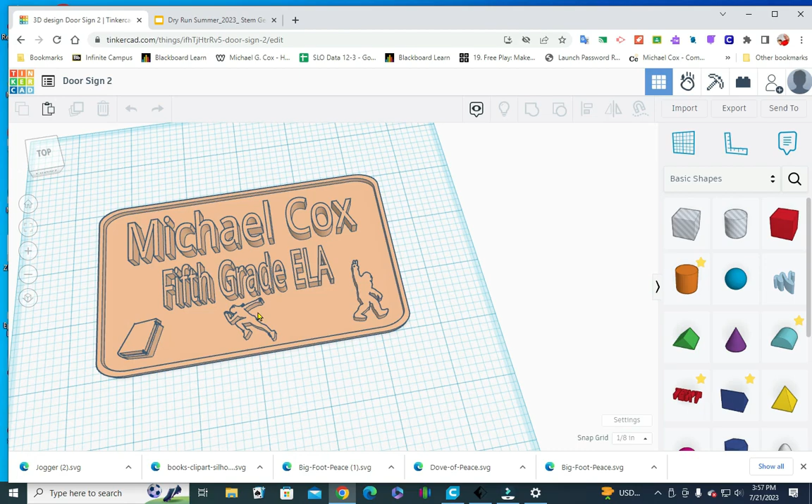Hello, today we are going to cover how to make a door sign with different symbols that are preloaded into our program. So we're going to get started.

I enlarged my cursor so you can see it moving around. Sometimes I tend to go real fast, so at any time feel free to stop the video, complete the task, and then restart.

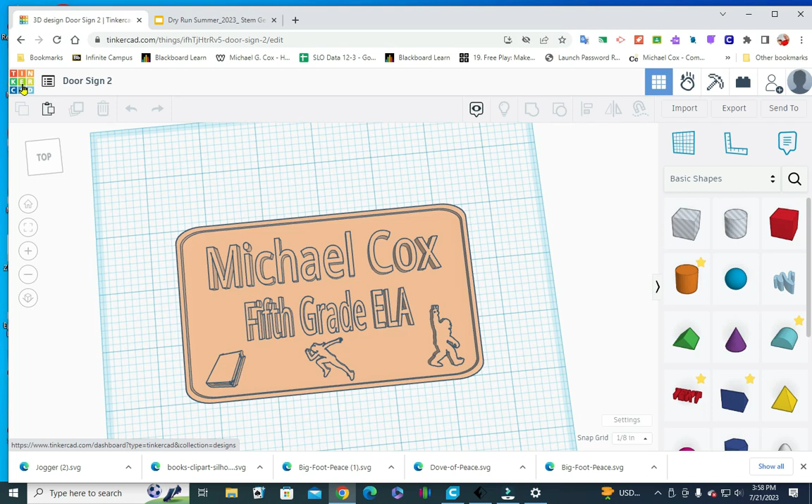So this is what our final project should look similar to. I'm going to go back to my home page, up here to the Tinkercad symbol. Click on that.

And it should take us back to our home. I'm going to come up here to create. Click on create, slide down. We're going to do a 3D design.

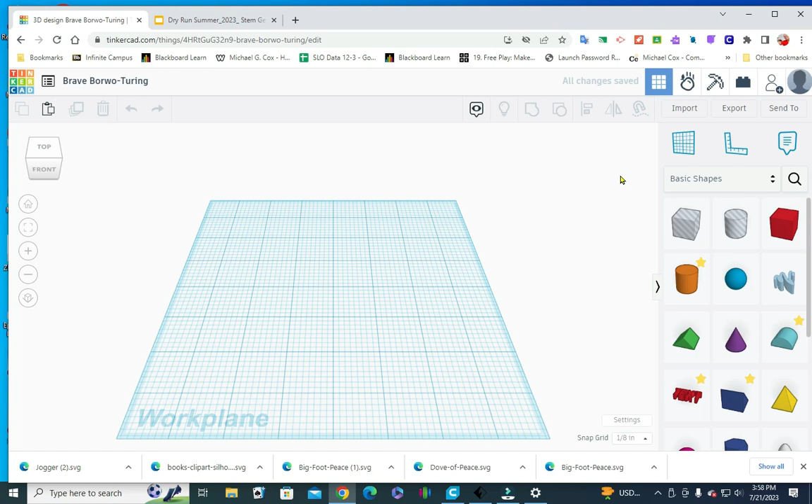And here we have our workplane. First thing we're going to do, we're going to slide up here and click on this text and give it a name. Please give it your name. I'll type Michael, and I'm going to put today's date, which is July 21st.

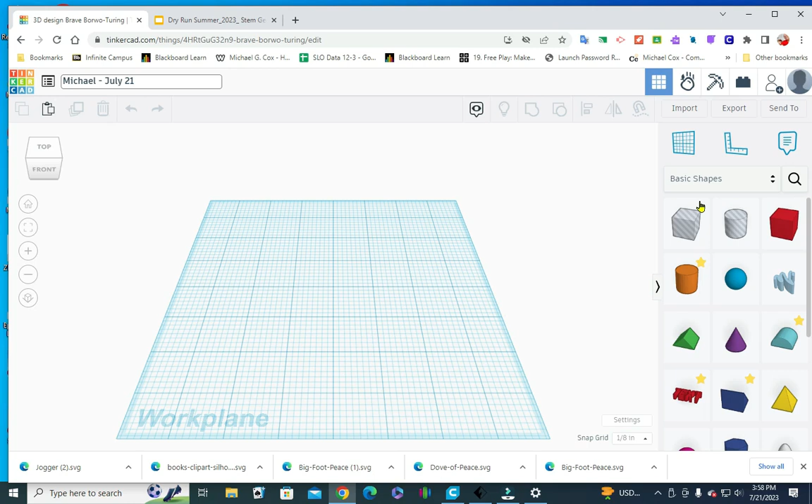Next thing we're going to do, we're going to make sure this is on inches because we're going to be talking in inches and the conversion can be challenging. So we're going to come down here into the corner of our page and click on settings. It says units. Mine's already on inches.

So you're going to drop that down, and you're going to choose inches. I'm going to suggest you make it default so that way you don't have to do that every time you open up this page.

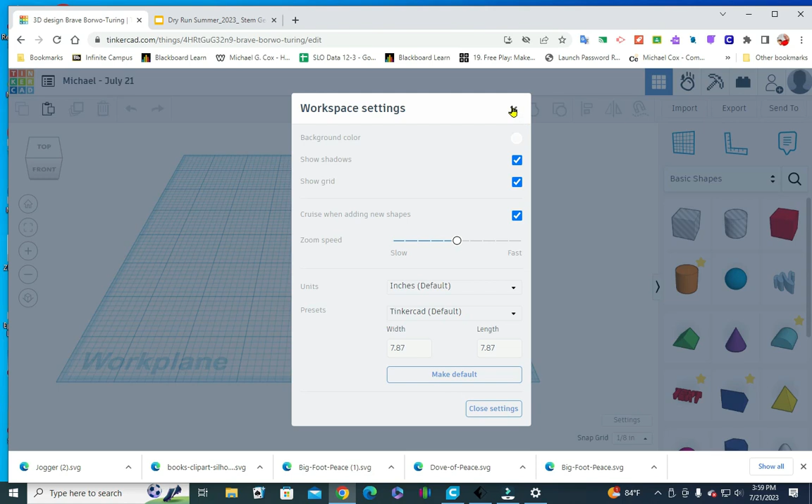So here we are. Here are our basic shapes over here. I'm going to assume you have basic knowledge of Tinkercad.

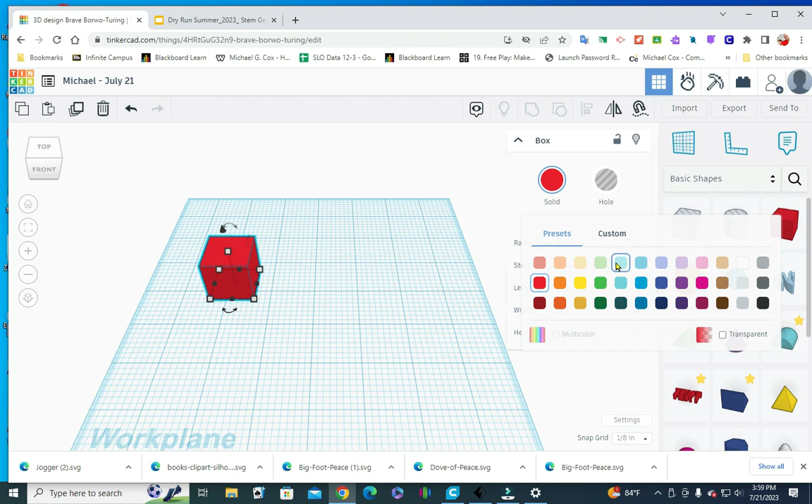For our door sign, I'm going to pull out a block. I do want to remind you, you can change the colors. It's not going to change the print color, but it makes it easier to work in a lighter color. You can see better, and you can see the edges and handles better.

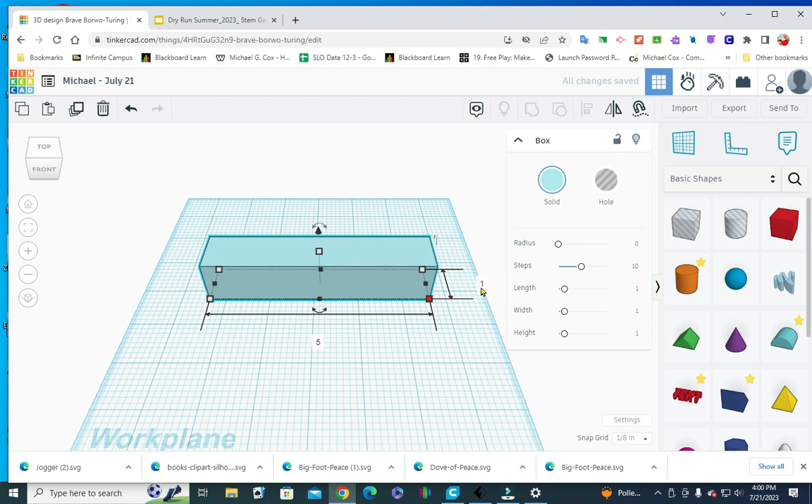We are going to click on this corner handle, and we are going to make this first one 5 inches long. We are going to make the second one 3 inches.

And we are going to go to the center handle, and we are going to make this 1/8 of an inch, which in decimal is 0.125. And there we have our basic shape of our door sign.

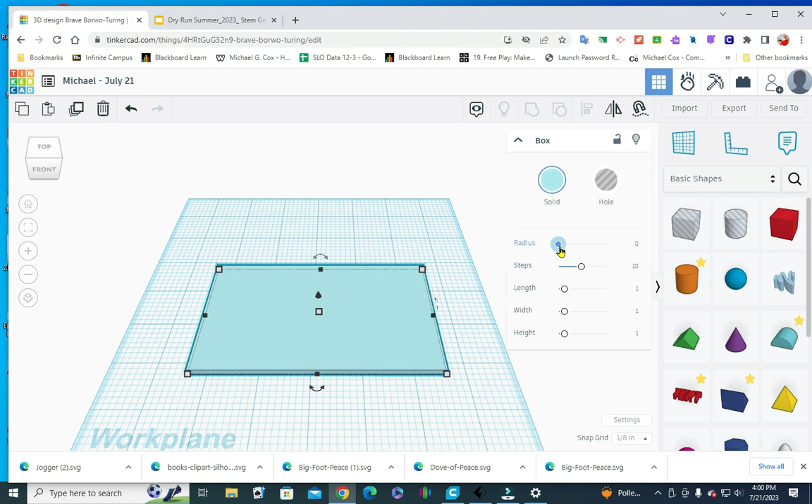I like to come up here where it says radius and round the edges just a little bit. And there we have it.

Whenever you're moving your shape around, please use your arrows on your keyboard. It makes it simpler and you will avoid making unnecessary changes.

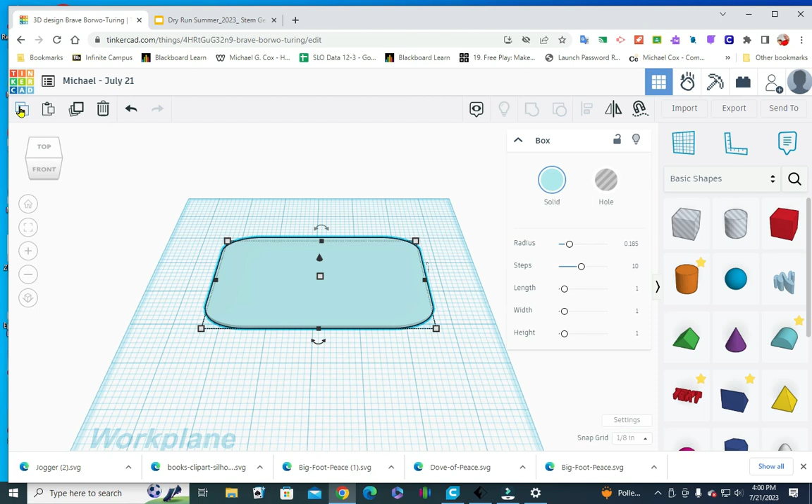So now that I still have it highlighted. I'm going to come up here to copy, and I'm going to paste. Now I'm going to bring down the item that I just copied and pasted with my arrow keys, and we're going to make this a little bit smaller.

I'm going to move my base up. So we're going to make this one a little bit smaller by 1/8 of an inch. I'm going to click on this handle, click on the 5, make that 4.875.

And I'm going to come over to this side and make that 2.875. And now it's 1/8 of an inch smaller than the shape we have up here.

We are going to leave that second shape, the smaller shape, highlighted. You see the little cone there. We are going to raise this off the board. You just click and drag and you'll get a number over here. We're going to make it 0.025 and enter. And it's just raised up barely off the board.

And we're going to also make it a hole. So the way you do that, you come over here, it says solid or hole. We're going to make it a hole.

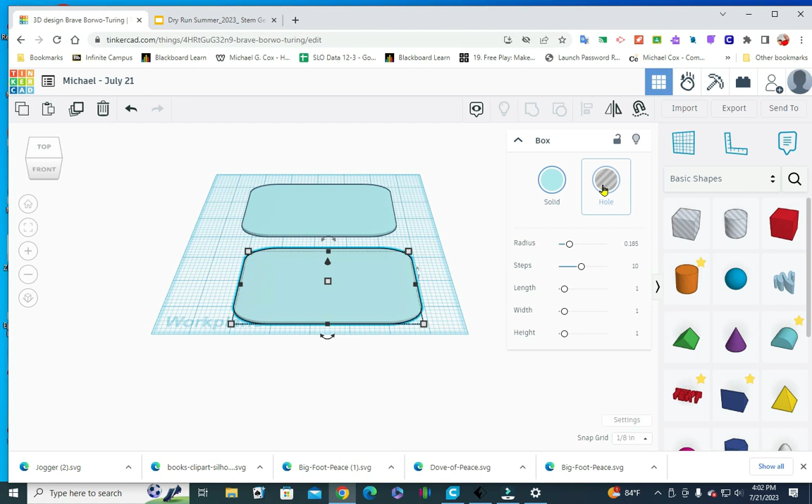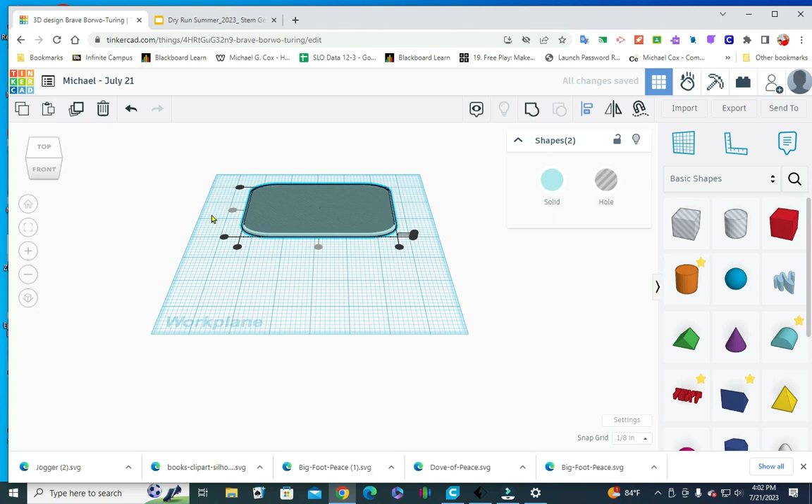Now I'm just going to bring it up here, put it over top of my shape, and I'm going to click and drag over both of them. Click on the align tool, and I'm going to align it on the X and the Y axis, and I'm going to group it together. And now we have our sign that has a little lip on it now.

Okay, let's make it a little fancier. First thing we're going to do is put our name up here. So I'm going to pull my text out.

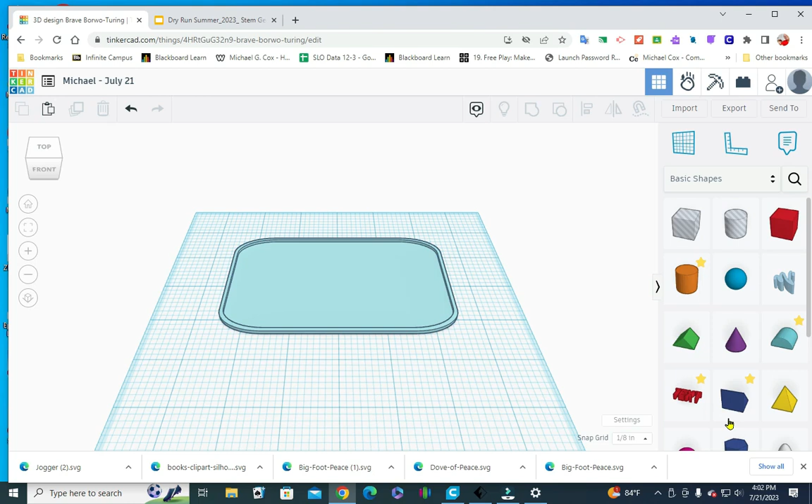I'm going to recommend that you use the font sans. That way you avoid those hanging text parts. See how they have the hanging parts on it? Sometimes when they print, they do not print so cleanly.

Alright, and then we are going to go to the Z axis, and we're going to change that height to 0.25, a quarter of an inch.

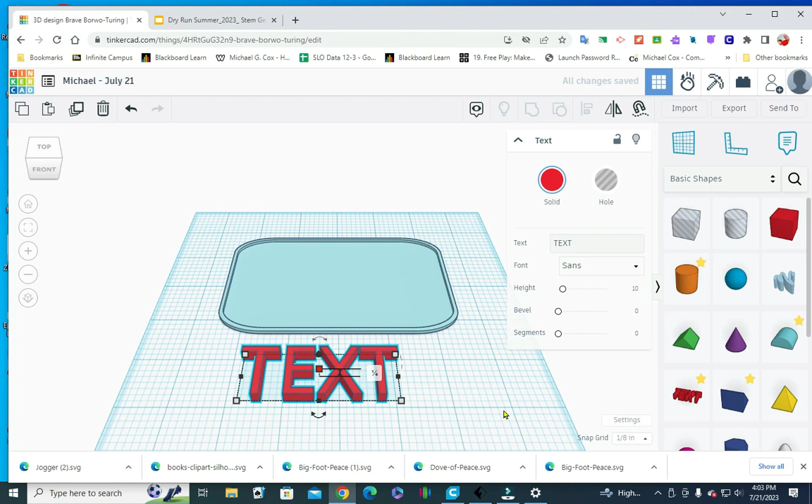Come over here to where it says text. I'm going to backspace that out of there, and I'm going to type my name in there. Don't be afraid if it looks so big that it's not going to fit, because we can shrink that down pretty simply.

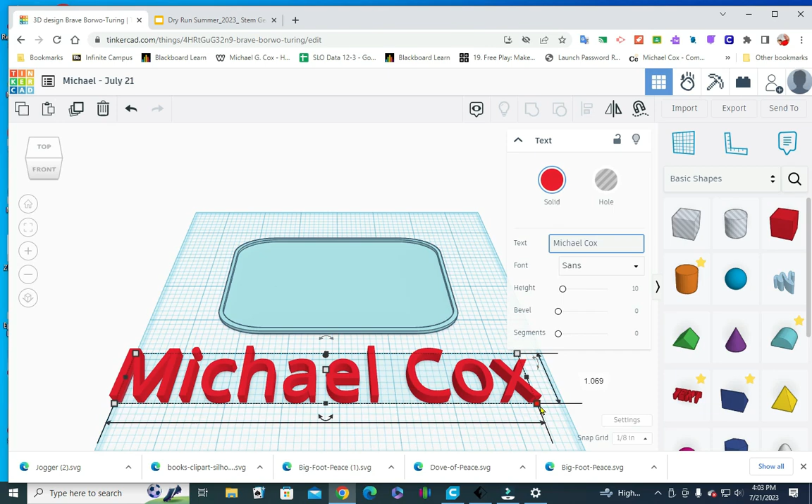So I have my name, and you can definitely see there's two different ways we can shorten this down, but let's just use our handles. So I'm going to click on that, and we know that this is 3 inches, the inside is 2.875, so let's make it 2.75, 2 and 3/4, and we figure this is 3 inches.

So we don't want to, since we're going to have another line and then some images, let's change it down the y-axis to 0.75, 3/4 of an inch.

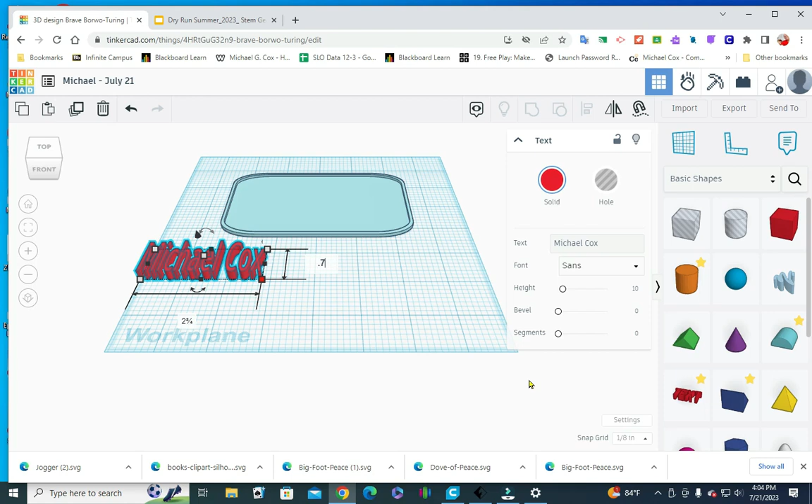Now I'm going to slide it over, move it up into the plane, and I see that I've made a miscalculation, which is fine, because this is more than 3 inches, it's 5 inches. So we can make this 2.75.

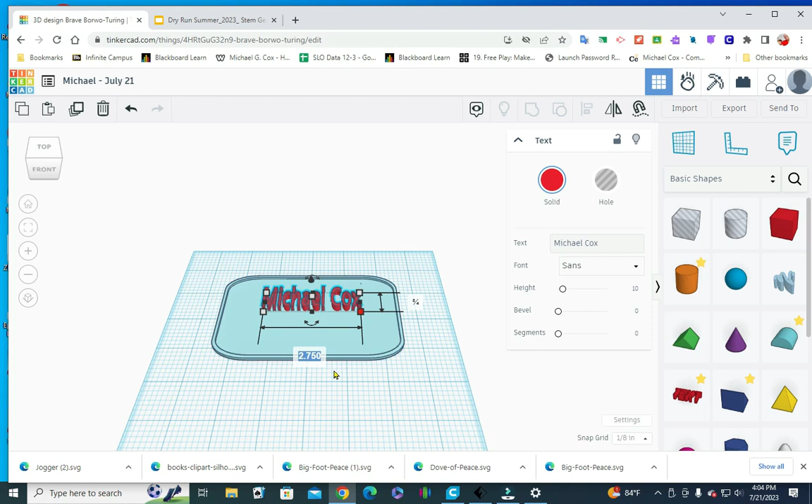And slide that over. It still looks kind of big. Let's make it 4.5. And it looks like it's going to fit on there.

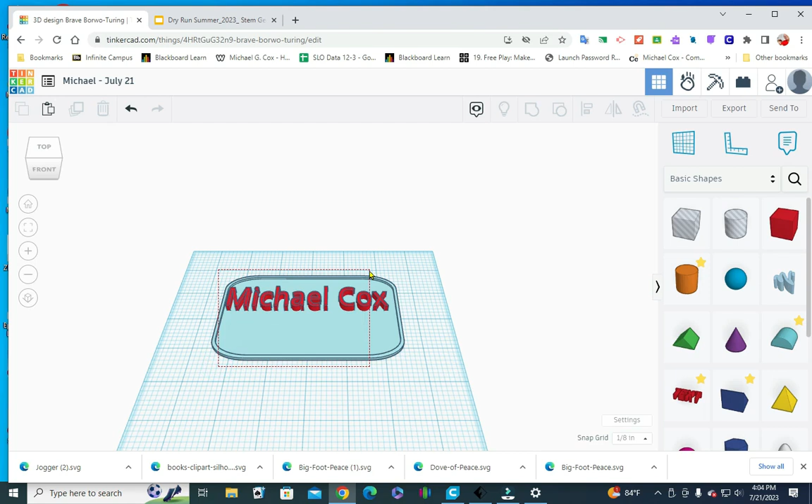I'm going to click and drag over it. I'm going to click on my align tool. We're only going to align on the x-axis because we don't want it centered on the y-axis. I'm looking at it from the top view, I clicked up here for my top view.

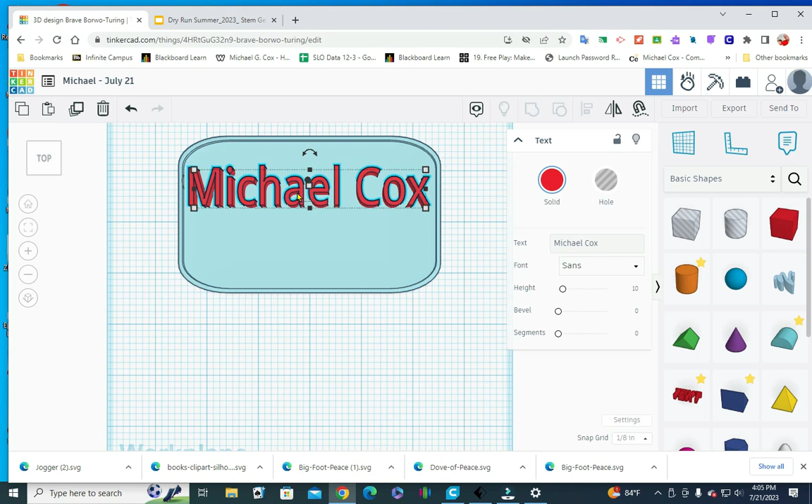And I'm going to raise it up just a little bit. What I am going to do to eliminate any possibility of messing it up, I'm going to group it together. Click and drag over it, group it together, and now we have our first section, our first part.

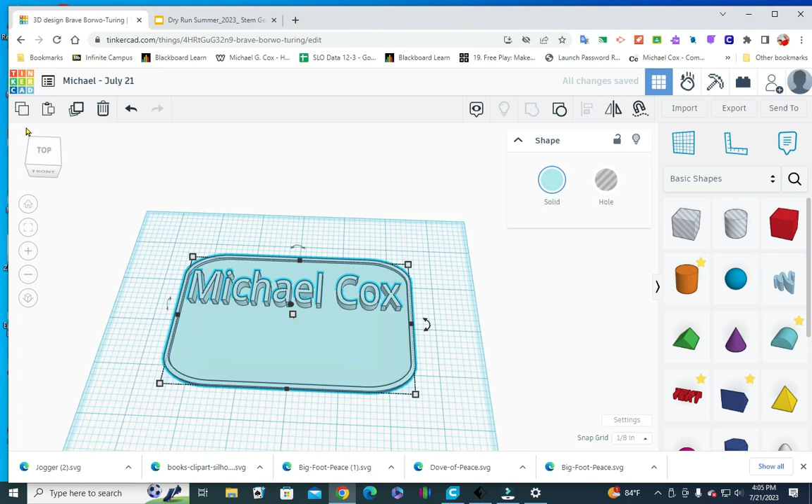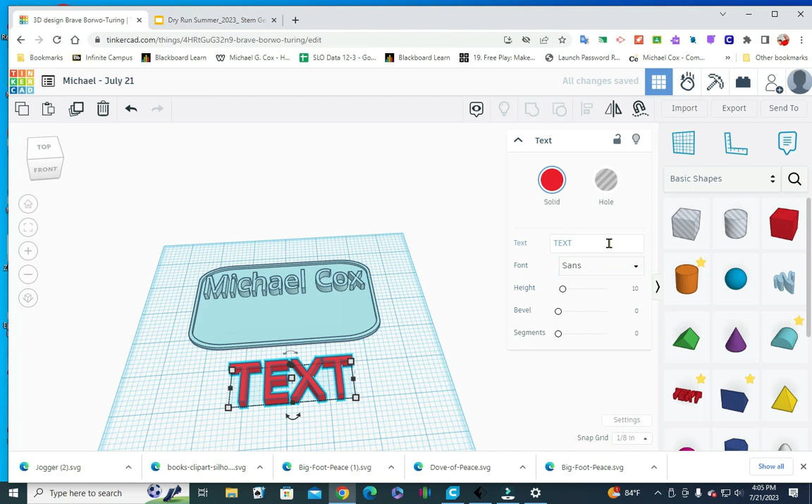I'm going to go get my text again. I'm going to change the height to 1/4 inch, 0.25 on the z-axis. I'm going to change the font to a sans so it doesn't hang over. And I'm going to put 5th grade ELA.

Same thing here, much too long for our piece, so I'm going to change it down to 4.5.

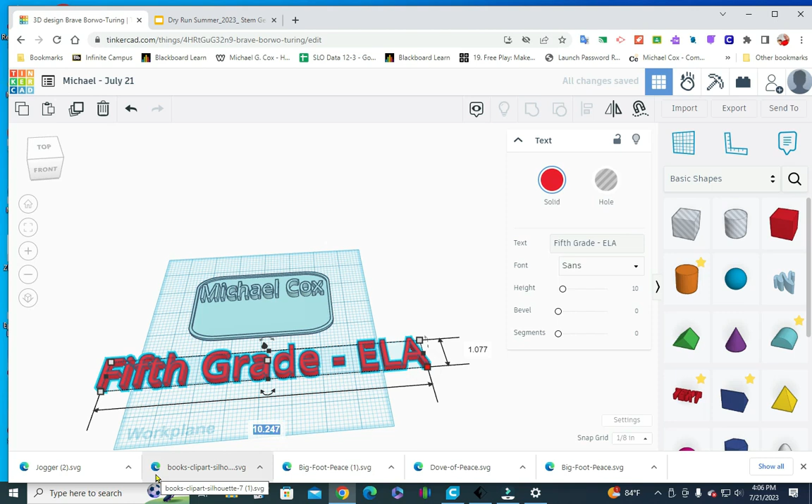And I'm going to change the height. I want to make it a little bit smaller than my name, 0.7, just a little bit. And then I'm going to fit it up there.

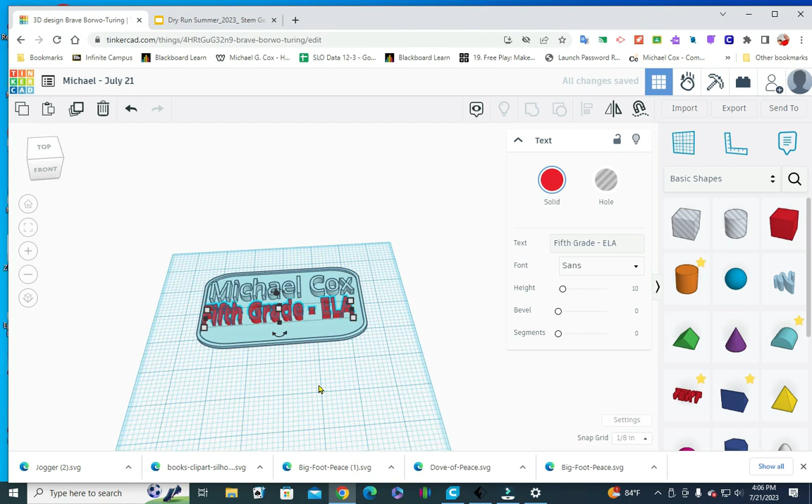I may even make this smaller. Yeah, I'm going to make this smaller both ways. Make it 4, and make it 0.6.

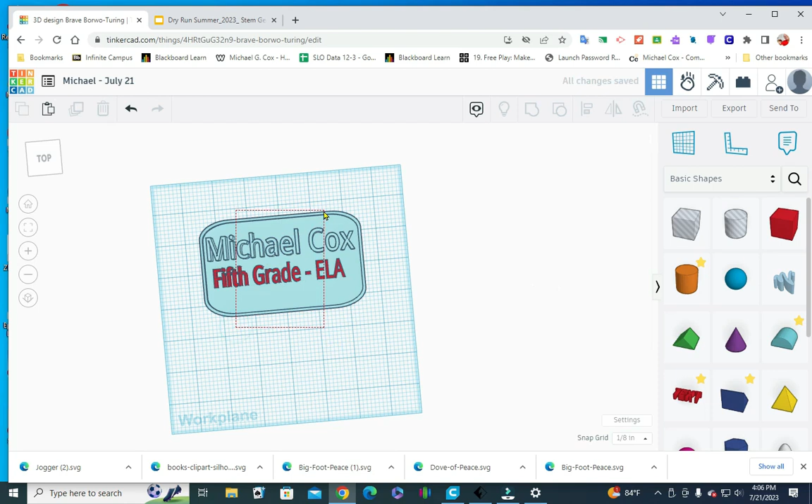I am going to center it by using my align tool. Looks pretty straight. I'm going to click and drag over both pieces and group it.

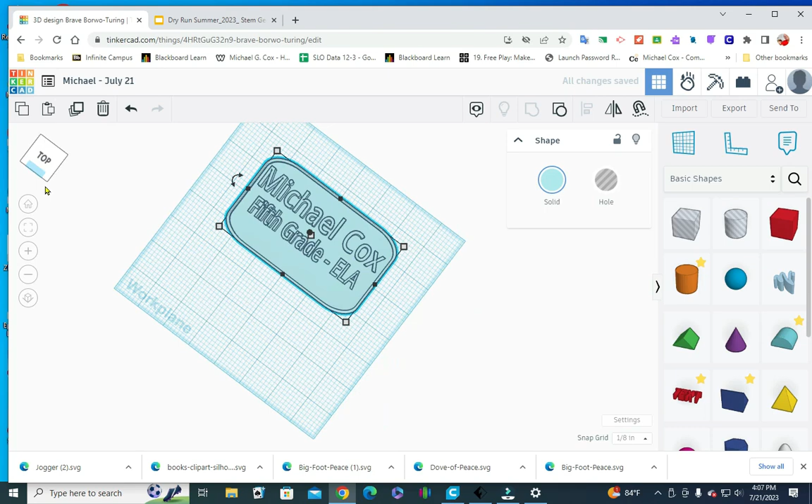Okay, now we're talking about those different pictures we're going to put in. Now this is going to be challenging for some, but I'm going to go to my Google Classroom for today.

I'm going to go to 3D STEM, and I posted some simple pictures and stuff. So since I'm doing ELA, I am going to put a book in there. So I'm going to click on this book, and then click on it again. I'm going to come over to these ellipses, these 3 dots over here, click on that, and open a new window.

Then I'm going to click on the ellipsis again, the 3 dots, and download. Now I'm going to go back to my design. I'm going to come up here, because this has to be an SVG, and that's why I loaded them up. You can't always just put the JPEGs or PNGs in there. It's not going to work.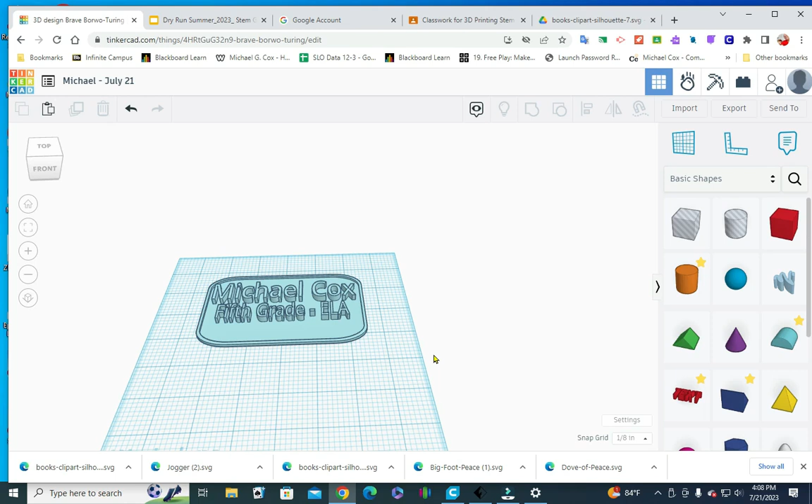So I'm going to go to Import, choose a file, then go to my downloads. Click on the books clipart, hit open, and resize. You want to bring it in real small, so I'm going to bring it in at 10%. I'm going to import.

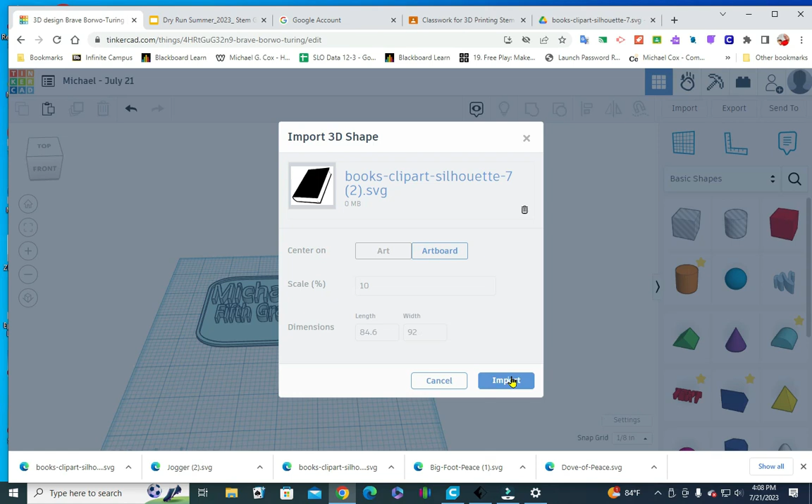Sometimes it takes a moment, sometimes it takes longer. This looks big, so we are definitely going to have to shorten that down. Just make it 1 by 1.

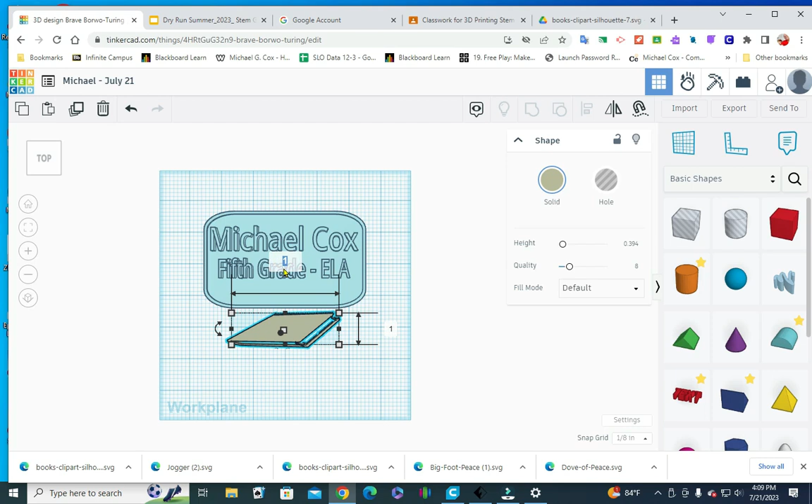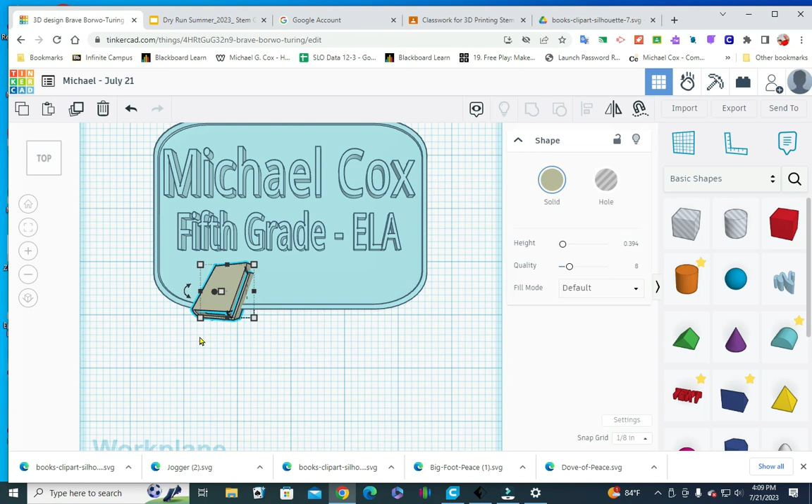Okay, it still looks like it's going to be too big. Now we can always enlarge this some more, click on this and make it 3.5 - whatever, you can make your book bigger or make your work area bigger. So now I'm just going to move it up. It's still big, so I'm going to make it 0.75, 3/4 of an inch. I'm going to put it in position.

Next thing I'm going to put in something that I like to do - this is for represent ELA. So I'm going to go back into my classroom. And lately I have been jogging, trying to get into shape, so I put a runner up here.

Same difference - I'm going to click on it, open this up, open a new window. Go to the ellipsis, download. You can see it downloads here. Go back to my design. Import, choose a file, I'm right in my downloads.

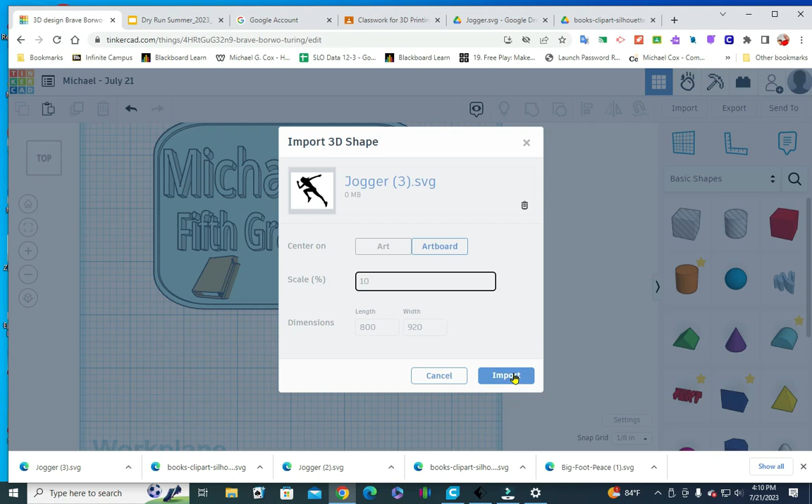Open, and I'm going to go 10% again. It's easier to work - I mean, you can leave it 100, but it's going to come in big and cover everything. It's really challenging to work with.

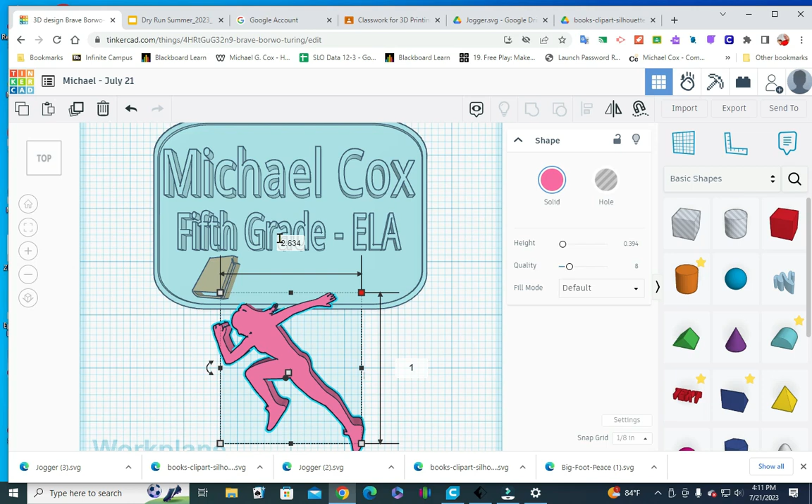I tell my students all the time they can do what they want. They can learn from the mistakes that I've already made. So this is 2 by 2 - again, I'm just going to make it 1 and 1, and it's probably going to be too big.

You know what I didn't do? So I'm just going to make it 3/4 again - 0.75.

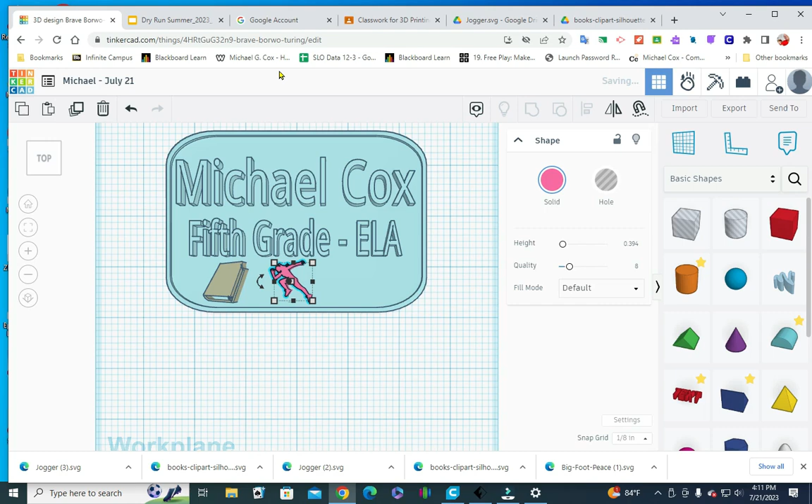One thing I didn't do on the book, we didn't adjust the Z-axis. So we can do that on both of these - see how big it is, how tall it is. So we're just going to click on the Z, and we're going to make it 0.2.

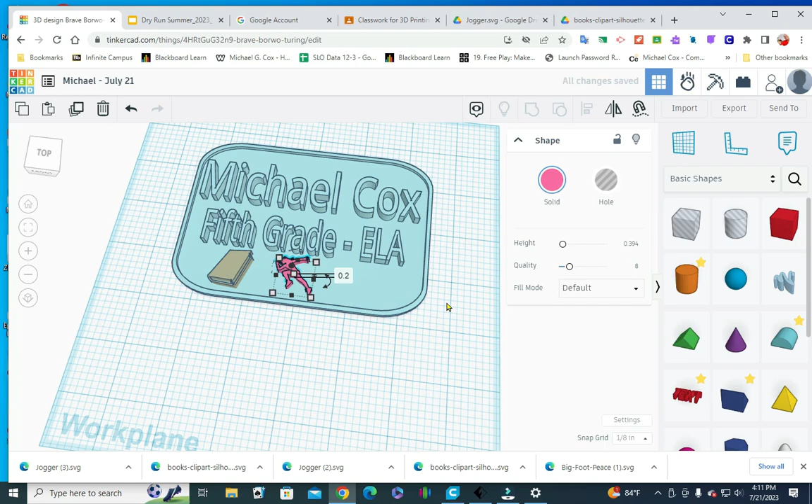Same thing with the runner - 0.2. And now I have my 2 shapes.

Now the final one - I want my learning environment to be peaceful, so I have a picture of Bigfoot giving the peace sign. So I'm going to grab that one. I thought it was made kind of like, you know, wild.

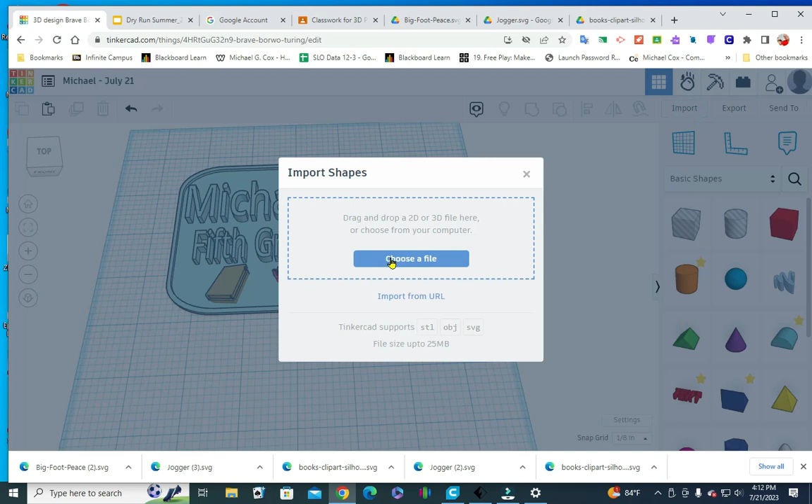Click on that, open a new window. Again, click on that ellipsis, download. And you can see it downloaded. Go back to my drawing. I'm going to import, choose File, Bigfoot giving me the peace sign, 10%.

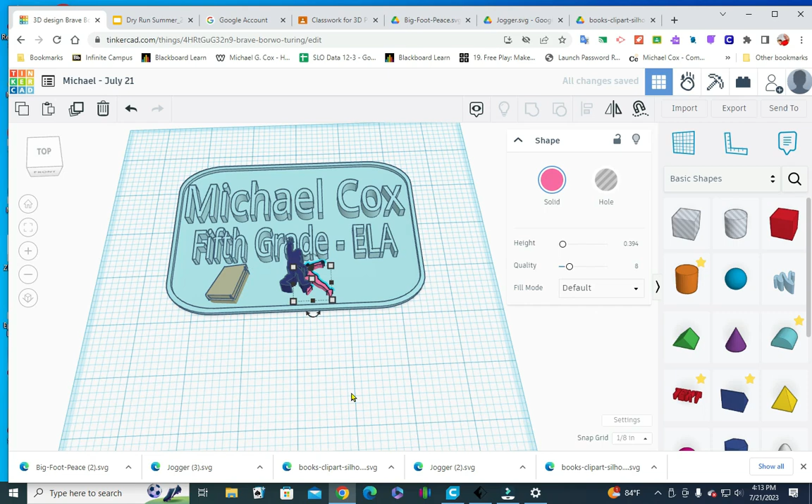There's my Bigfoot, let's move him over. Oh, I'm moving the wrong one. Sometimes if you're having a hard time determining which one to click, just roll in and you get a better fix.

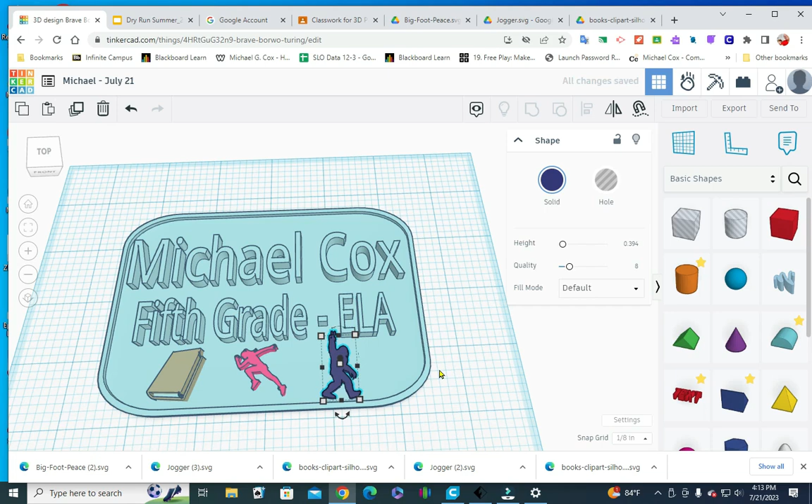Make it 0.2 for the Z. I'm going to put him down toward the bottom like he's walking along. And that's going to be it - that is essentially it. Be creative, do your own thing.

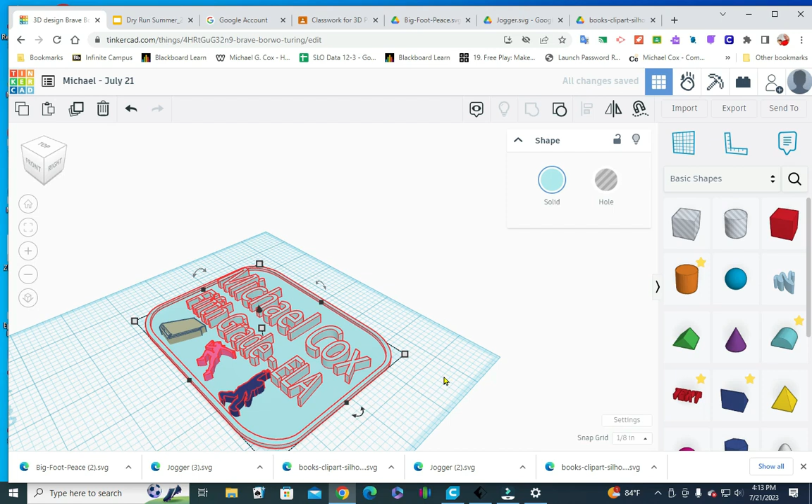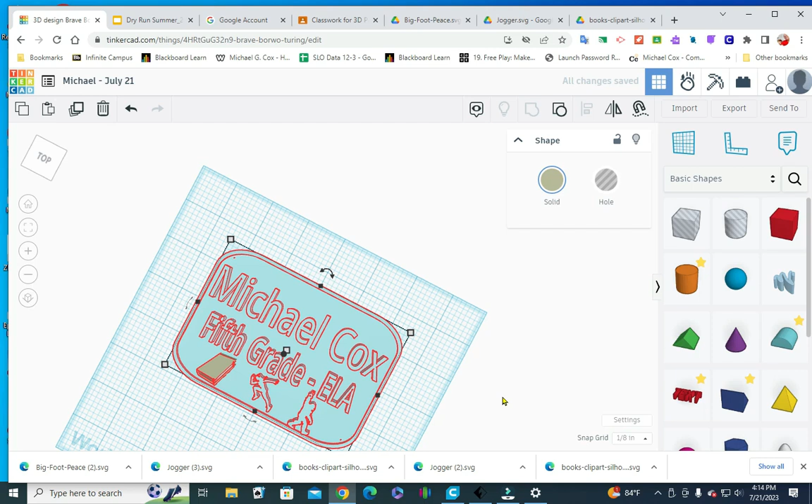I'm going to try to group them all together. When you group them all together, they sort of look the same color. Let me double check - see, they didn't group, the book didn't group in, and the reason I knew that is because it didn't change color. So I'm just going to group, pull the mouse around them together, and group them. And that's it.